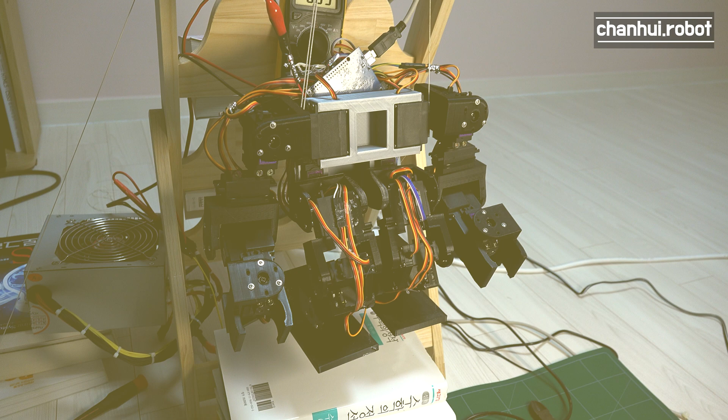Assembly 1. Insert 4 M3 nuts and motor, and insert 4 M3 bolts.

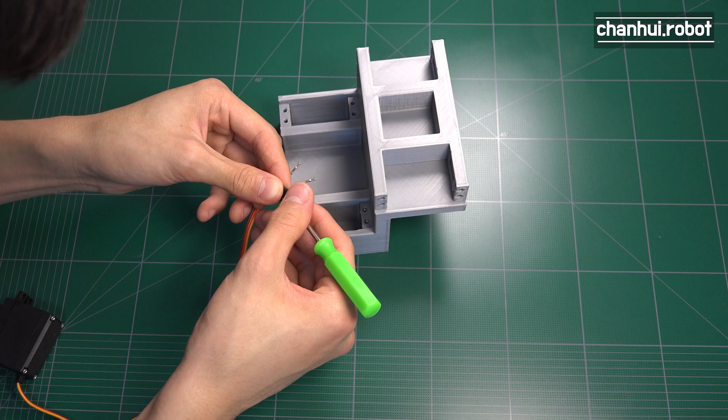Assembly 2. Assemble, insert connector bolts, assemble, insert axis bolt, M8 nut.

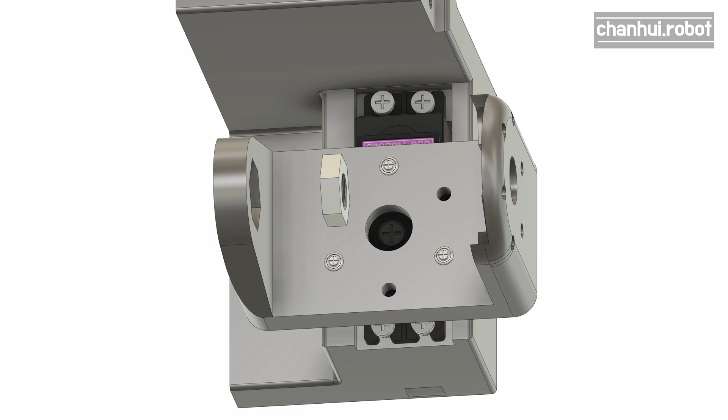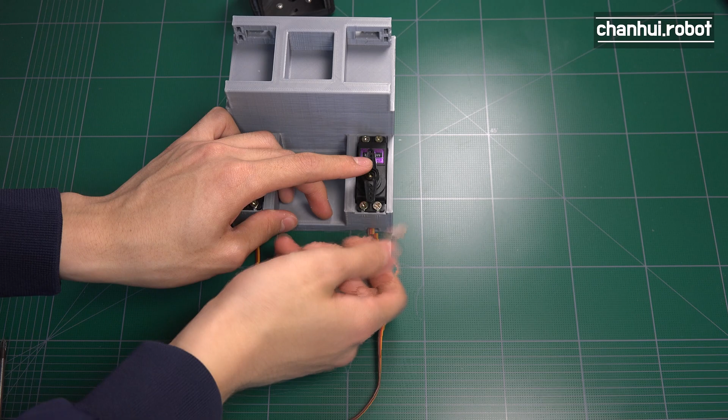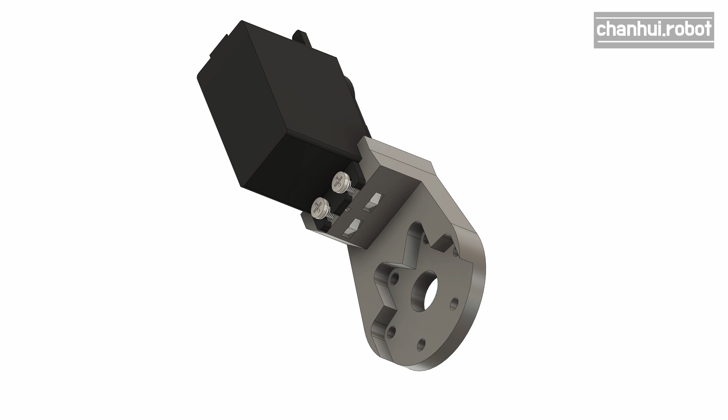Assembly 3. Connect your motor and leg frame part 3 with M3 nuts and bolts, and then pop out your motor's backside, and then connect it with leg frame part 2 and connect it, and then insert bearing and M8 nut.

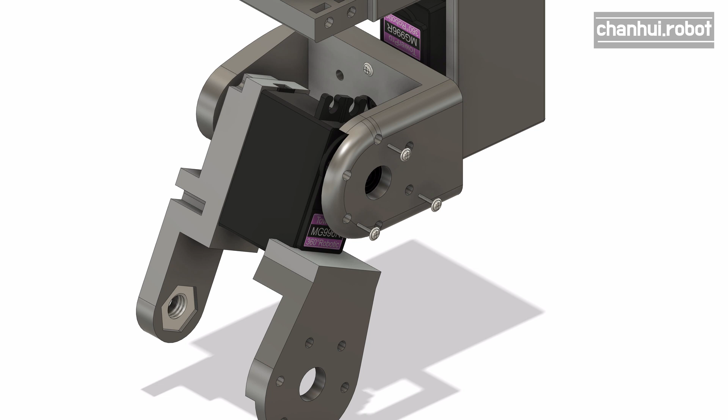Connect connector to your motor, and then assemble parts and insert connector bolts, axis bolt, and no head bolts.

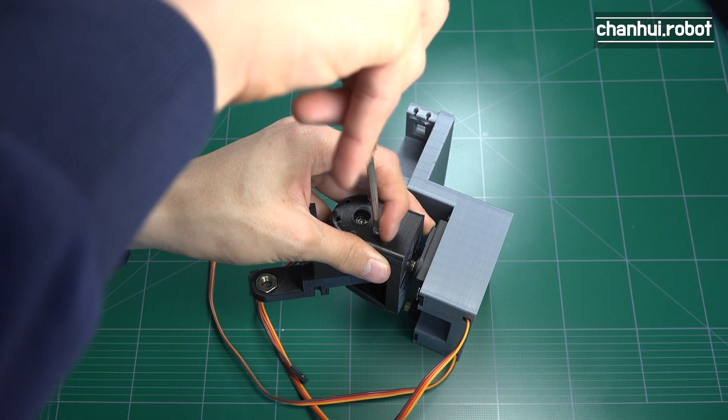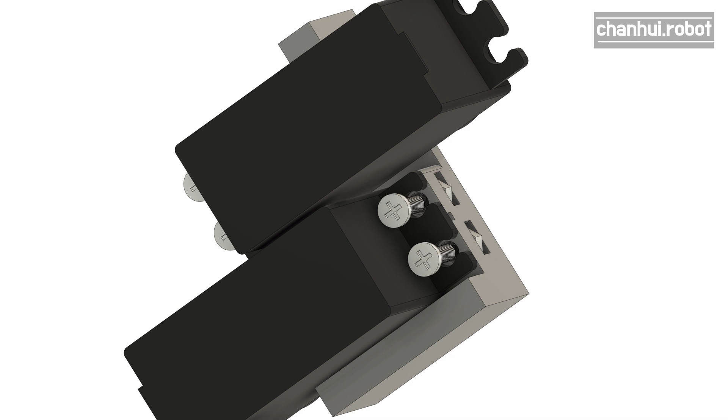Assembly 4. Insert M3 nuts and connect motors and leg frame part 4. Insert bearing, and then insert connector and axis bolts.

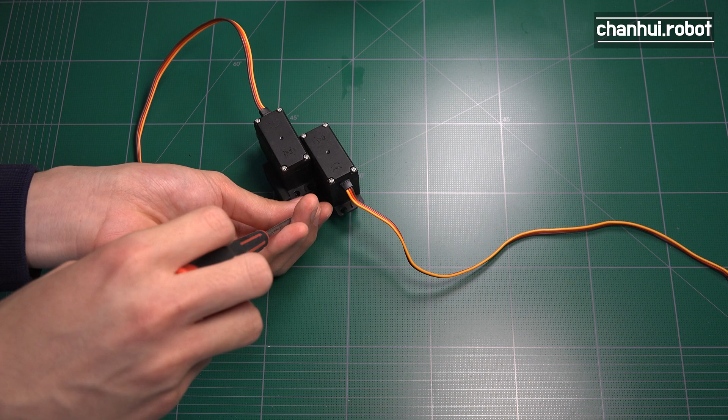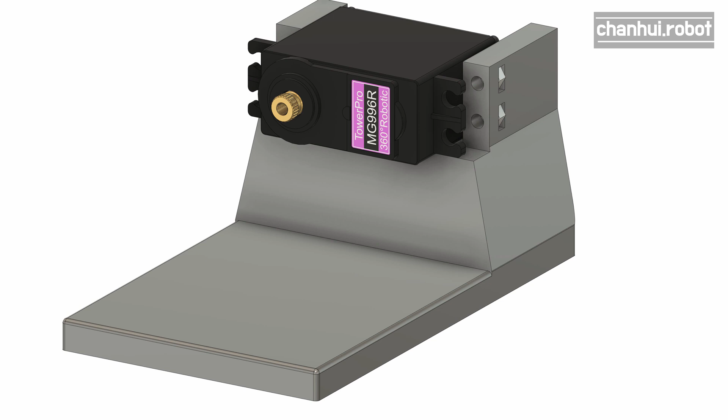Assembly 5. Insert M3 nuts and then insert motor and connector and leg frame part 6. Insert M8 nut and connector bolts and axis bolt.

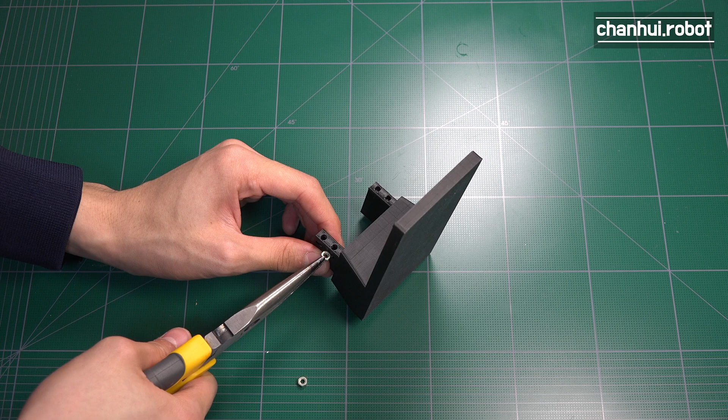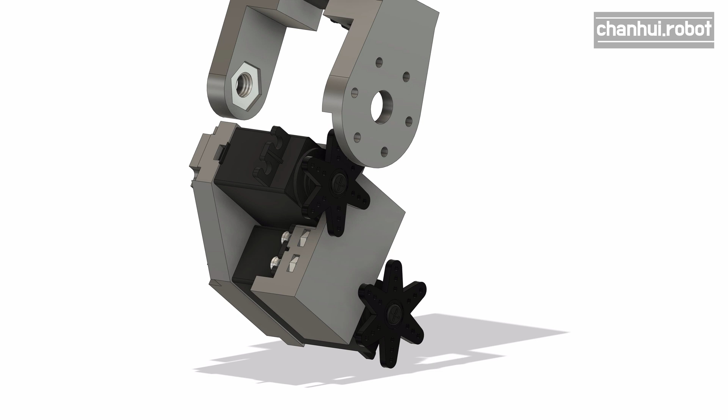Assembly 6. Connect your parts and insert connector bolts and no head bolts.

And then you can do the same steps on the opposite side.